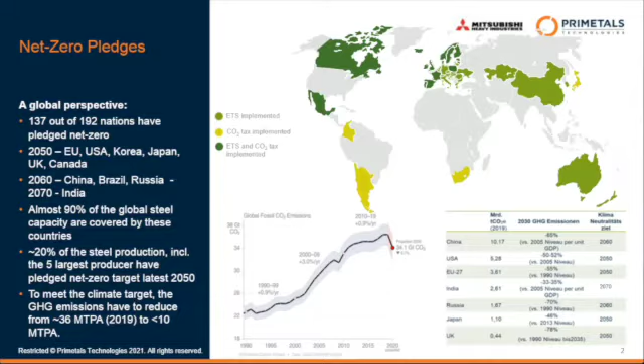If we break this down to steel, some facts and figures: 70% of steel production still runs on coal - that's actually what we have to move away from, and we still see about 2 tons of CO2 for each ton of steel produced on a global basis. As Ken was saying in the introduction, steel production causes about 10% of global greenhouse gas emissions, and this is scope 1 and scope 2.

And the demand for steel will still continue to grow. Well, this depends on whether we follow more of a sustainable development scenario or not, but definitely we will arrive at a minimum of 2.1 billion tons of steel in 2050. Well, what it really requires is a massive amount of renewable electricity.

And just assuming that we switch 10% of the steel production towards a hydrogen-based DRI economy, that requires 630 terawatt hours of renewable electricity for the green hydrogen. Just in comparison, Germany produced last year about 250 terawatt hours of renewable energy. So it's really massive, and it comes also with the fact that...

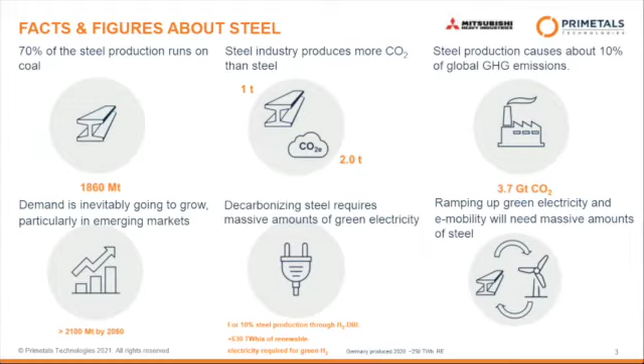Green electricity and also e-mobility will require a massive amount of additional steel. The consumption rate of steel per megawatt hour produced for wind and solar is much higher compared to fossil type power plants. Well, that's basically a bit more on the figures and facts.

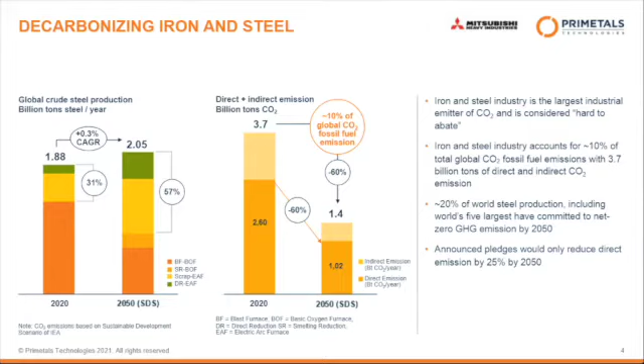So just showing that actually we still produce only 31% of the steel via electrification, utilizing electric arc furnaces, while we will see a tremendous change here, going up to almost 60% in 2050. So this requires electrification, it requires a lot more renewable power in the future. And we have to achieve minus 60% on the direct emissions, but also on the scope 2 emissions, in a sustainable development scenario.

Well, if we look at what happened over the past 2 years on the political development side, I want to start with Europe. It started exactly 2 years back when the Green Deal was announced, and it states now to achieve minus 55% CO2 reduction versus 1990, and achieving net zero in 2050. So there's an investment plan that covers 1 trillion euro over the next 10 years to boost the economy and to achieve these environmental targets.

But the next steps actually in discussion are about ETS and CBAM. Well, the CBAM might be an instrument that really helps to avoid carbon leakage into Europe from outside. So most affected would definitely be Russia and Ukraine. There is an EU proposal draft out, to phase out the free allocations for the hard-to-abate sector, which would have a significant impact on the European steel industry.

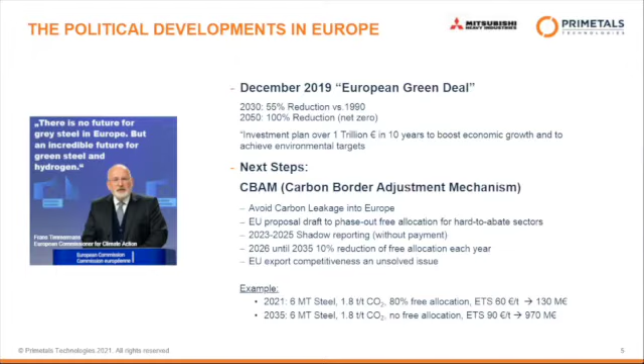This CBAM at the end would not solve the issue of EU export competitiveness. I put an example at the bottom line here. If we take an integrated steel mill producing 6 million tons of steel, emitting 1.8 tons of CO2 per ton of steel, and today, as a starting point, getting 80% free allocation for the CO2 emissions with the ETS price of €60, the steel mill will have to pay 130 million euro. And if we look ahead into the year '35, with no free allocations and an increased ETS price of 90 euro, we end up close to 1 billion euro of payments year by year. I believe that's the main driving force for investing into the transformation for green steel.

Well, on the outcomes of COP26, some were saying there was not enough progress. At the end, I personally believe there was quite a substantial move forward. First of all, I took here a summary from Boston Consulting that was recently published on the major outcomes of COP26. The Paris rule book has been completed, and I think that's essential to pave the pathway forward. We have to have guidance on the rules, and we now cover 90% of the world in relation to GDP, while if we look back to the year 2019 at COP, it was just 30% of the nations.

Well, there was also a move forward in deforestation. So 141 governments pledged to reverse deforestation. And methane is a relatively new topic on the agenda, but there's a large commitment of governments to focus on methane leakage and to apply existing technologies to reduce it. On coal, finally there was no signature of any agreement, but at least there was a commitment to halt coal funding, starting with the year '22, and to reduce coal consumption, and also an announcement like from China not to invest into new coal-fired power plants.

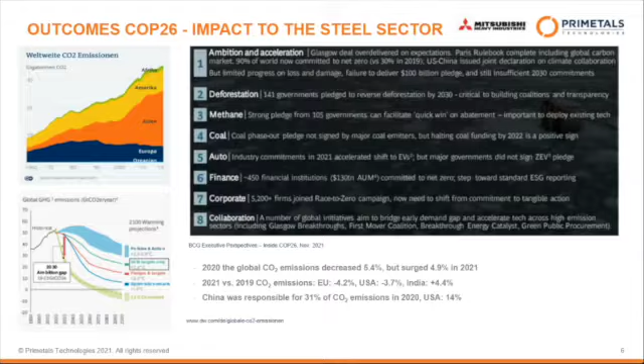To move towards steel now, actually the big challenge is to transform the traditional integrated steel producing pathway, where we still stand at the best figures of 1.7 tons of CO2 per ton of steel, including already the credits from various gases and slags. So we will see a phased approach, most likely.

On the one hand, direct reduction plus electric arc furnace. As an example here, utilizing 80% DRI, 20% scrap in the EAF, we can end up, even if we reduce with natural gas, reducing carbon emissions already by 2/3. So it's an essential way forward, even though we don't have green hydrogen yet at scale.

The most promising route would be the recycling route, just melting the scrap, 100% scrap. And if we consider a low grid factor on scope 2, you see 80 grams CO2 per kilowatt hour, which is already targeted in the EU for 2030, it can be as low as 130 kilograms of CO2 only - minus 90% over the blast furnace route.

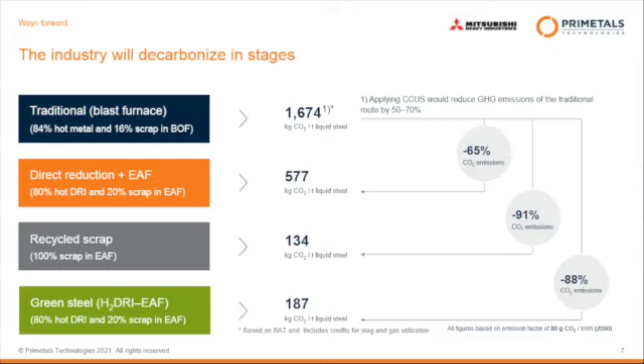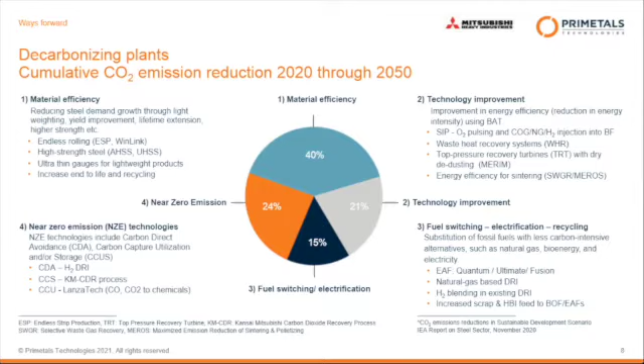Well, just opening up for our discussion, I think the biggest issue for the steel industry is the raw material dilemma - on iron ore and scrap. First of all, it would be perfect to recycle scrap and remelt it.

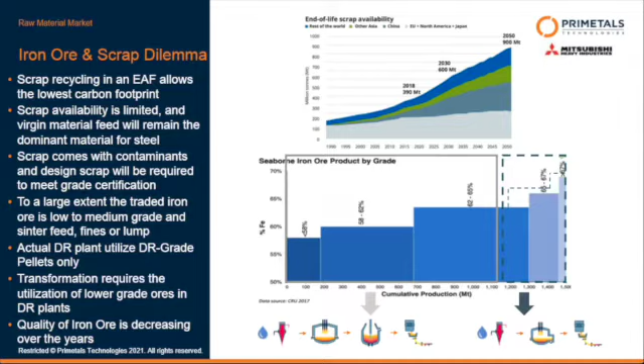Back to scrap, I missed one thing. Scrap always comes with tramp elements, so we have a contradiction. On one hand, we go for new high-end steel grades. On the other hand, we want to use as much scrap as possible, and scrap comes with tramp elements. So we will have to clean up scrap in the future to provide design scrap that meets the quality requirements for the steel.

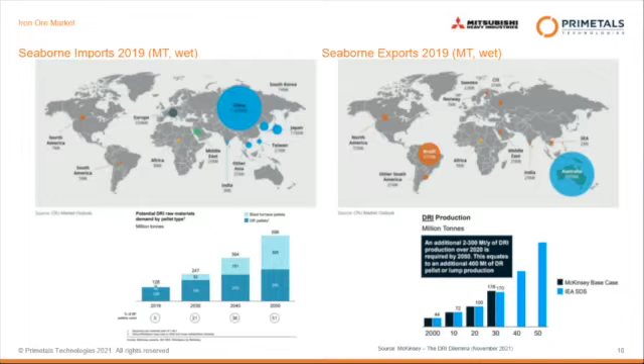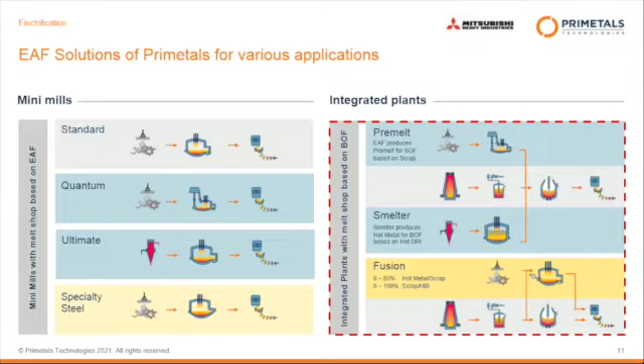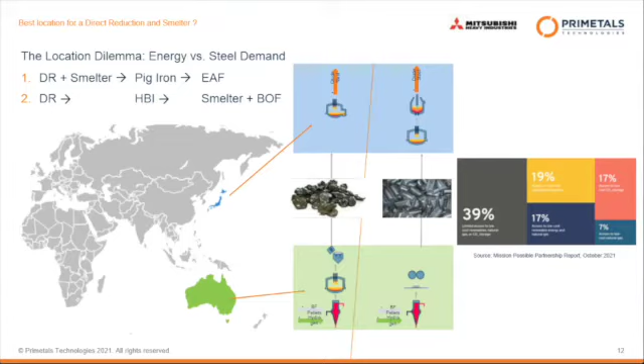While if you ship HBI, you cool down the DRI from 600 degrees C - so you lose 600 degrees C - and feed cold HBI into the furnace. So it's an energy efficiency question, but on the other side, also an energy availability and energy price question. Quite interesting for the future. And that's the last slide.

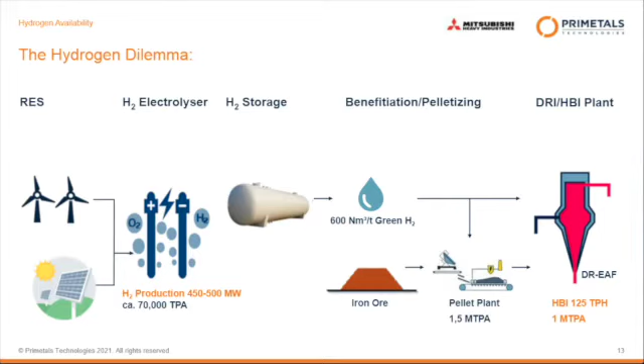Sure, Alex. Thanks. The one thing that always strikes me when we do these types of things is really the interest in decarbonization has triggered so much availability of information about how we actually produce all of the things that most people take for granted, quite frankly. So it's always staggering to me to have these kinds of conversations in that regard. And I love sharing this kind of stuff with my students, to be honest, because it's eye-opening.

I had a really basic question for you, because you actually referred to this near the end of your presentation. It's one that occurred to me right at the start, and one of the questions from our audience members actually refers to this too. Although his question is specifically with regard to India, you mentioned the location dilemma. That's a really interesting one, because typically when we think about economic development and the infrastructure intensity of developing economies, steel is central to that. Usually what happens is you try to maintain control of as much of that value chain as possible. So if you're going to grow and develop, the more local production you have to feed that development, the better, typically.